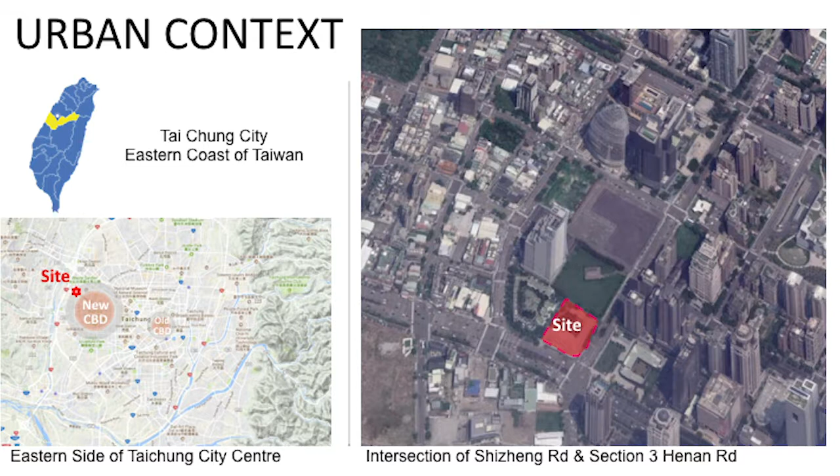And we are on a major street corner and next to a park. We're right in the dead center of the CBD. So as you can see, our site is next to the park.

Now there are many new buildings around, and all the buildings, these high-rises, they're all boxes. Some very interesting, beautiful buildings, but they are all generally boxes. I think most high-rises are boxes. So one thing we try to do on this project is how do we get away from that simple box.

It's just to resolve all the function. The problem with boxes is you're either inside or outside, but you cannot have a kind of spatial environment inside. So that's one area we wanted to tackle.

Also, in Taiwan, like buildings in southern China, you have a lot of these very local houses, local buildings from history, from the past. So we try to touch upon that, but in a very modern way. Our client made it very specific that he wants a bank that is very, very modern.

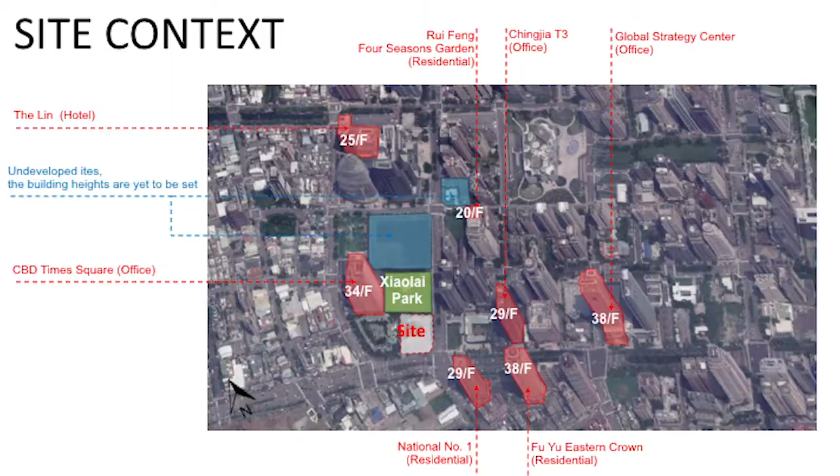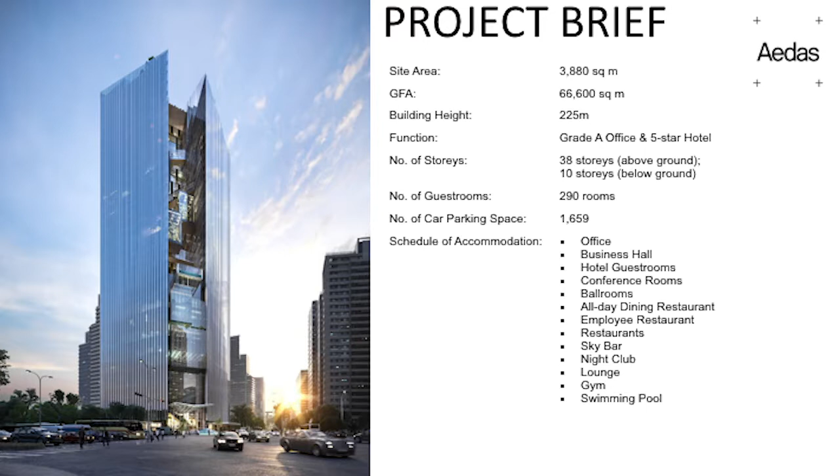So if you stack the program together — and we do quite a lot of skyscrapers — this is what you have. You'll have the hotel stacked on top of the office building, and on the bottom you have the headquarters and the main lobby for the headquarters, and then some amenities on top. So that's the basic diagram you have.

So what we tackled is, how do we make this building a place? Now, just a little bit about our client: he is second generation. He just became chairman of the bank, and his father worked his lifetime to create this bank.

It's called Taichung Bank, and now it's become a national bank in Taiwan, one of the main national banks. So he specifically wanted to dedicate this building to honor his father, who's very healthy but just retired, stepping down, with the son taking over.

So how does he honor his father? We wanted to give him a way to honor his father by giving the bank and this building to the people. Usually a bank is like kind of all enclosed, so how do we give it to the people, to create a very interactive environment that is friendly?

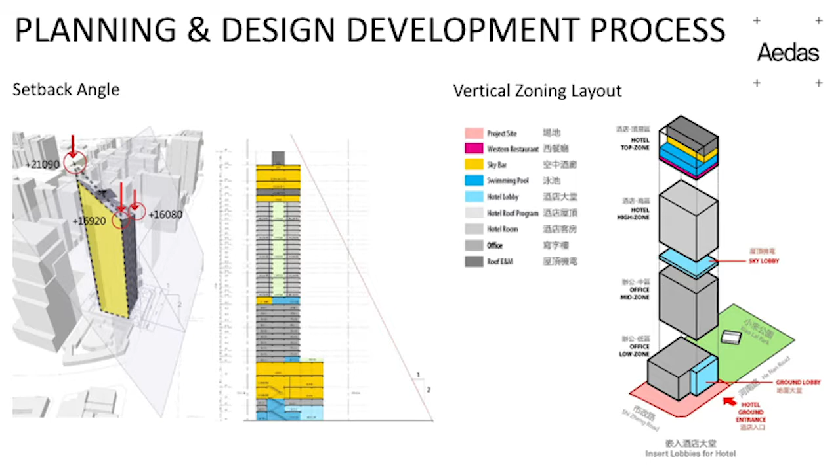So what we did, very simply, is we cut the building in half, opened it up, and put all the amenities — all the blue you see — in the middle of the building.

So what you're doing is creating — if you go to Taichung, Taiwan, you have many of these traditional buildings that are one story with a courtyard in the middle. What happens is you go in and find out that the heart of the house is actually outdoors, it's green.

So here, in a modern way, we try to achieve in a three-dimensional vertical way that the center of the building is outdoor, it's green, like the traditional Chinese building.

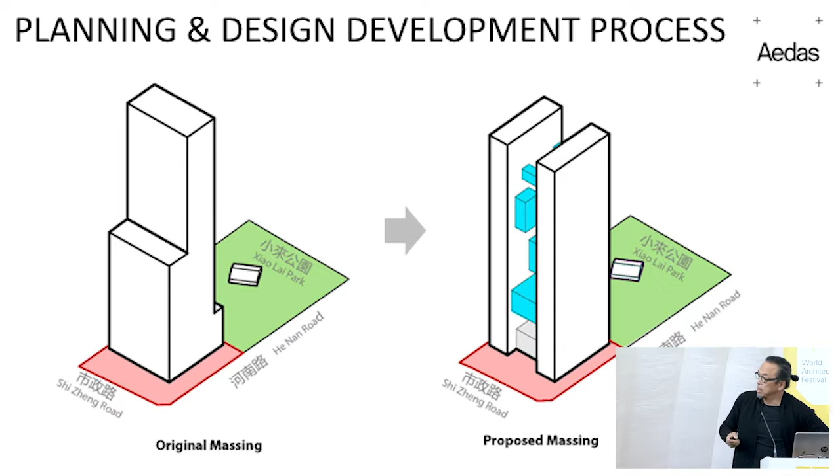So how do we address the street corner? We take that green center and turn it 45 degrees, because it's right next to that building. Turning it 45 degrees creates an urban space, a street corner that people can gather.

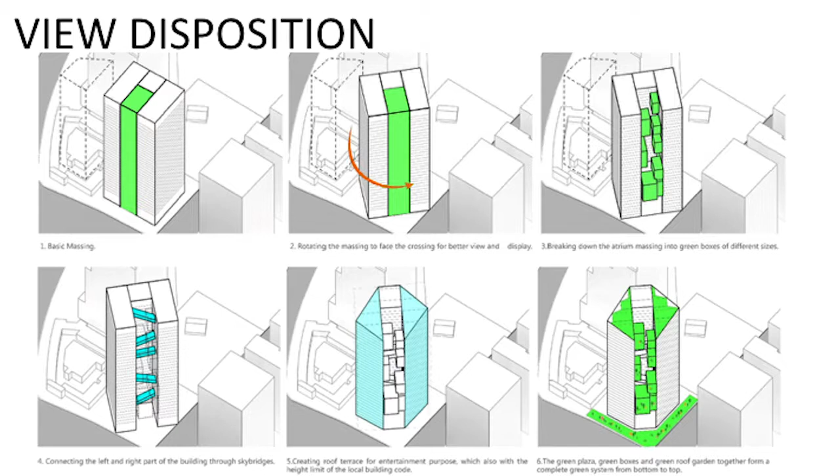And then you put in the amenities, break up the amenities in the middle, and link the two sides. So you have the building with the amenities, and then we put green inside these — I'll call them boxes now, but in actuality they will become...

lanterns. This is the Taichung Bank in Chinese, and that's their logo. You can see the logo — we kind of adapted to it, so you have these two things holding a void, a space in the middle.

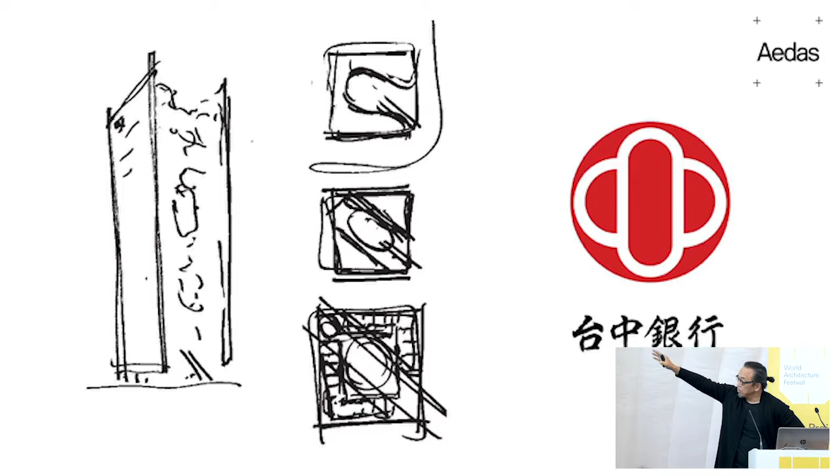So in a very similar manner, this is our first sketch of the building. When you open it up, we try to create the space inside, link the spaces, and adapt the spaces to the function.

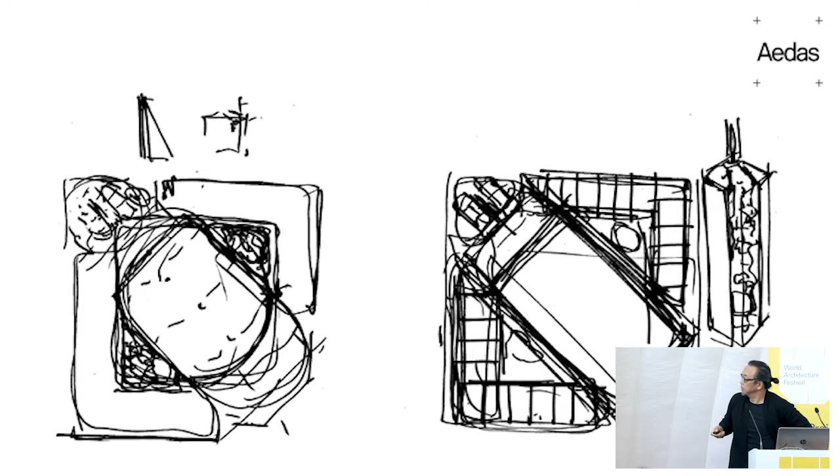So in actuality, this plan is very much like the bank, their whole idea of giving and working with the people. So these are the first initial sketches.

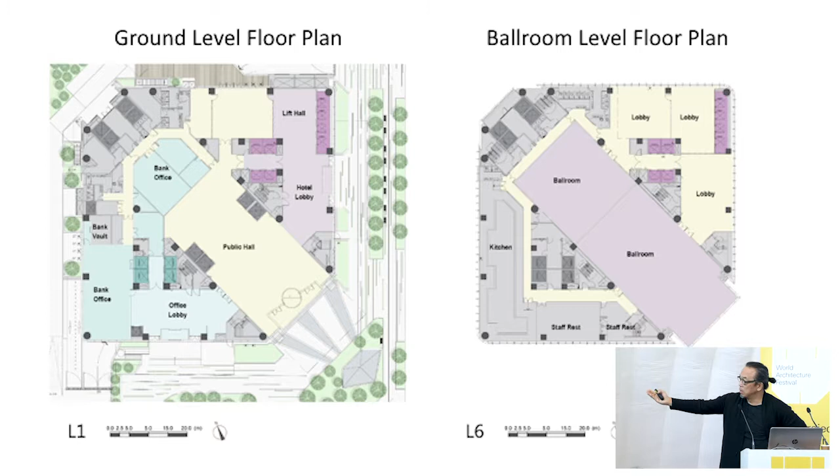Just a little bit about the plan. The yellow is our main public hall. Right here on the corner, you can see that we created a gathering space that brings the hall in. The hall is public, not just for the bank, it's for the public. The bank can use it, the hotel can use it, but although the bank and the hotel each have their own entrances, they can share the center space.

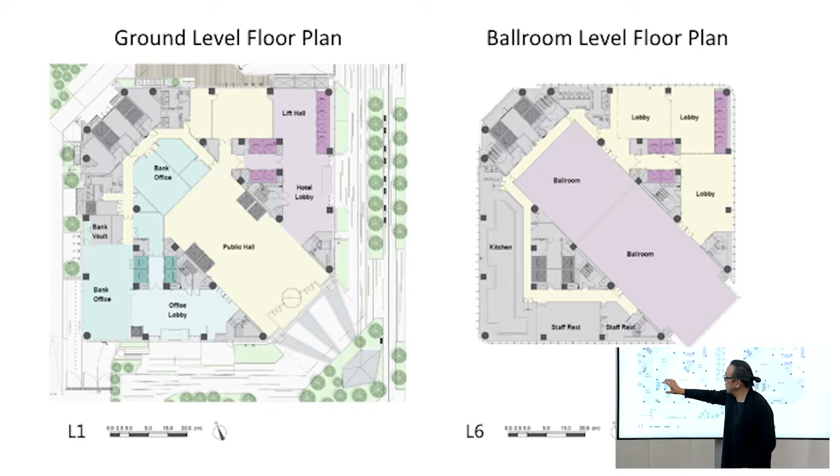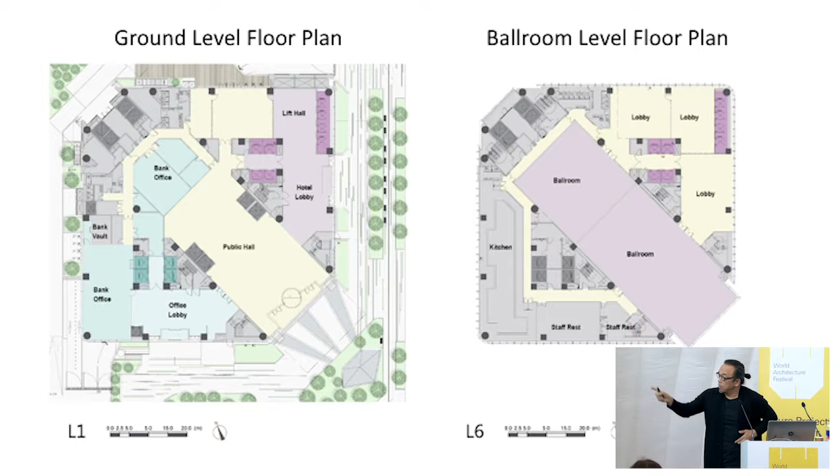I just want to make a point there. There are 3 cores: hotel core, office, and bank core, bank office, and that's mainly for services. So that's about efficiency, because as you go up the building, it's going to become 2 towers rather than 1 - one on the bottom, two on the top. With 2 towers you'd have 2 sets of fire stairs and all this, but this way the back is connected, so it's very efficient.

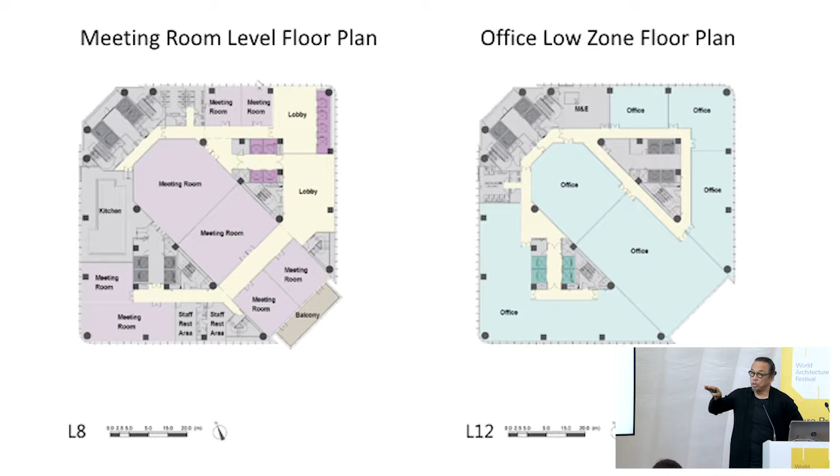We put all the amenities in the middle, all the meeting rooms and the ballroom for the hotel right in the middle. At the top of the ballroom, on the 14th floor, we put a swimming pool. A little change from this function - we've recently been working with the hotel consultant and changed their program with the pool.

We made it all restaurants and bars right around this pool, and we're also putting the hotel lobby in the area. We want to make that floor, that pool area, the heart of Taichung - where all the young, cool people would hang out, right around the pool. And of course the pool is a glass pool - it cantilevers out 10 meters, so you can see it from below up.

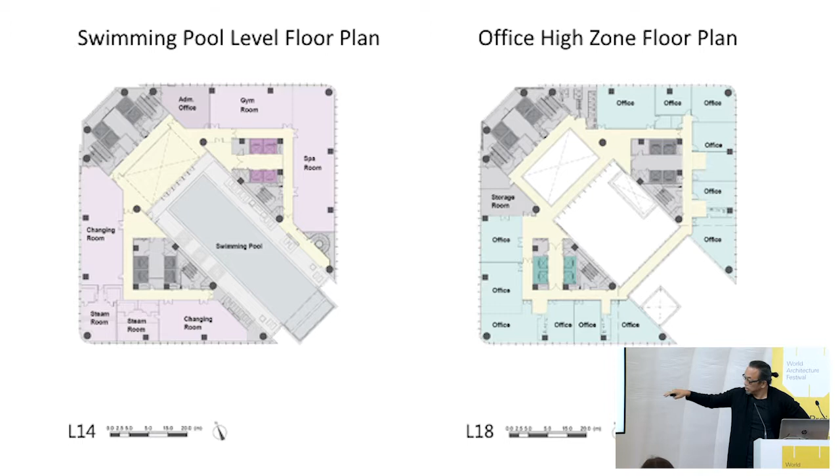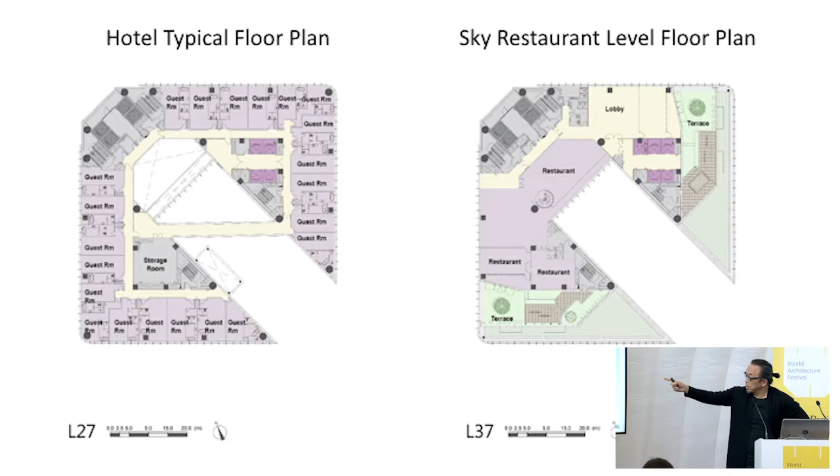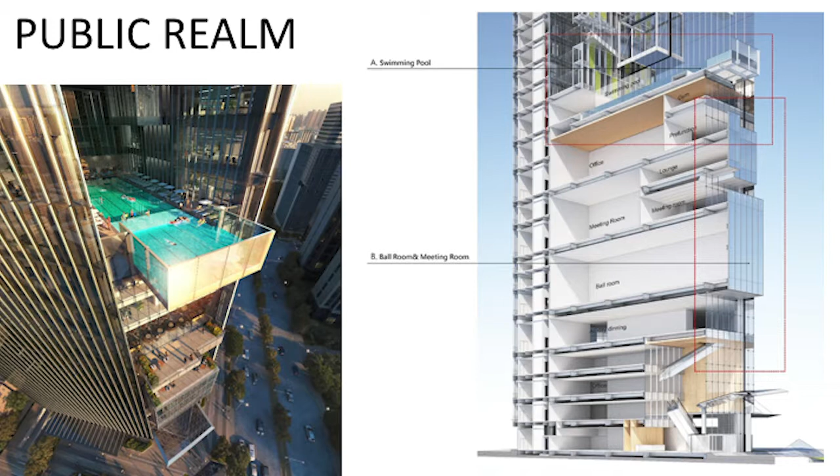Inside is that public lobby, which we're going to make into an art exhibition lobby on the bottom, and you can see the pool cantilever out. These are just some of the stacked amenity spaces. The lobby is a 4-story high lobby, very well lit.

You can see on the pool, that area - we developed the design and it's now even more green, kind of like a real green heart up there. That's the cantilever; the glass is actually acrylic.

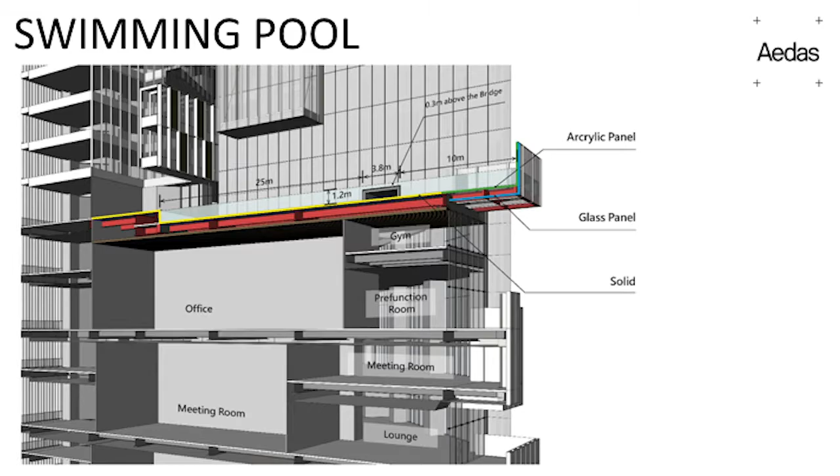So you look at the pool, and as I mentioned, opening up the sides - you have restaurants wrapping all around, and these boxes on top are lanterns, possibly colored, attached to the elevator lobbies on the different floors. You can enter them - there are little gardens inside, and they overhang the pool.

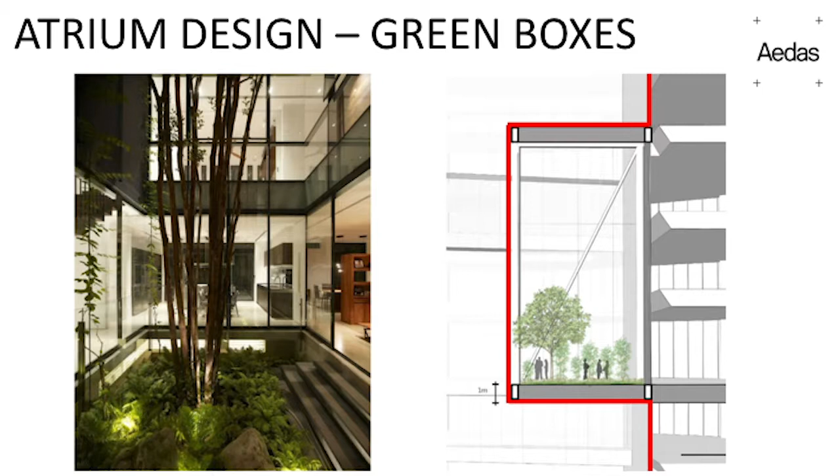So that's kind of a section - you have different heights. This particular one is three stories, so you can grow big trees inside. On the walls of that garden, which we're starting to call a secret garden, you have LED panels - not for commercial advertisement, just for art displays, a very interactive art display with plants and lanterns, Chinese lanterns of course.

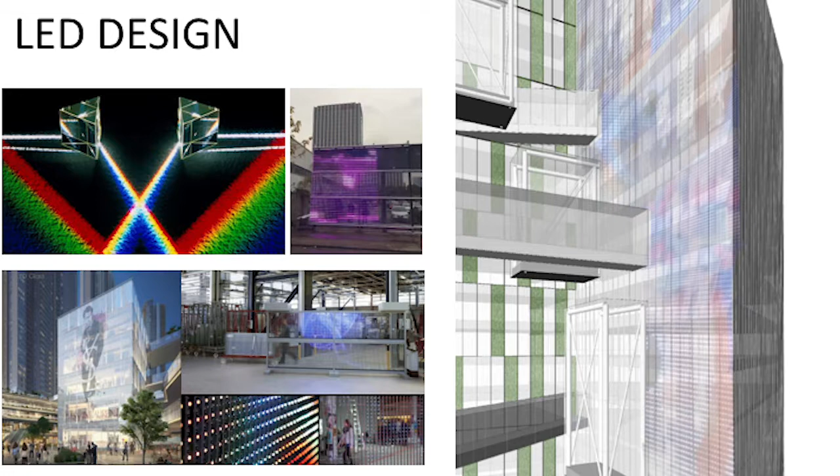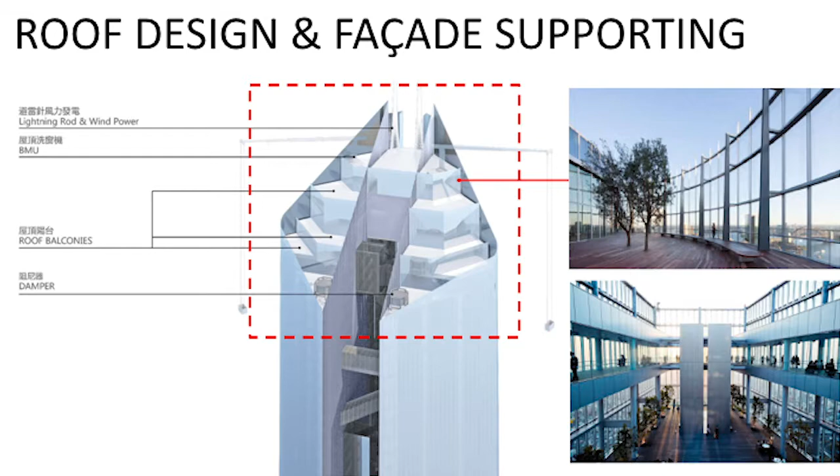On the top of the building, rather than having corporate conference rooms and stuff, we chose to have coffee shops and restaurants, and they terrace down so you can enjoy the outdoors.

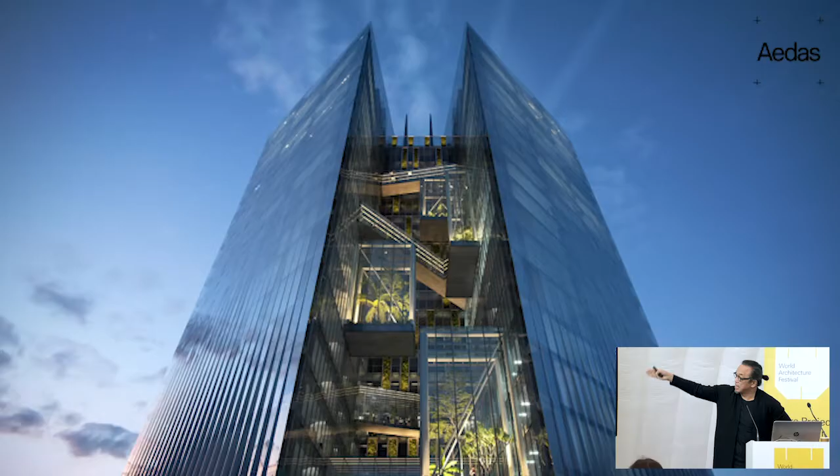It's the happening place, the place everybody wants to go - to hang out, have a cup of coffee or a drink with your friends, or have breakfast and brunch. That will be the place, shared among many people with the office, the hotel, and all the public spaces. And that's looking right up the building.

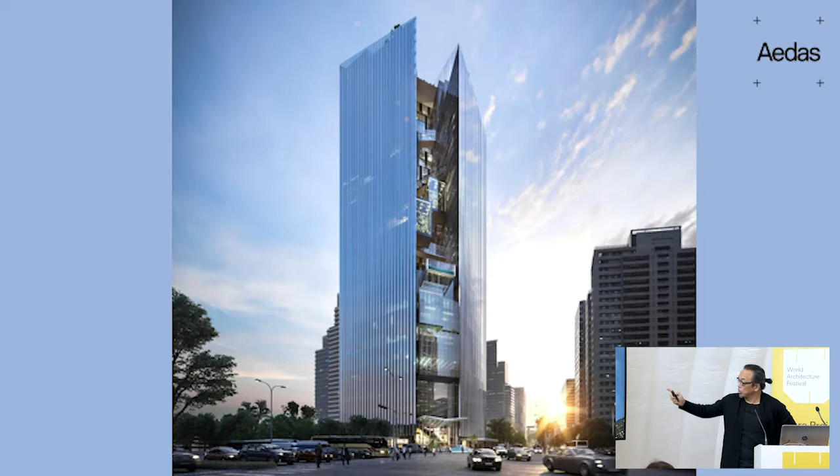I'm a really keen swimmer, so I'm completely sold on your pool. And I like the idea that this is a kind of box of public amenities that becomes a kind of vertical street, with people congregating for different activities.

I just want to follow up - how public will it be? Given that you have a bank and hotel with security and access, if I just wander in off the street, could I use the pool? Well, you have to.

Bank entrance is here. Hotel entrance is over here. That's the public lobby, yeah, with constant art exhibitions. So you go into the hotel, up to the lobby, and the check-in lobby is actually on that floor.

We're going to combine all that together with restaurants, the pool, and gym. So that's going to be happening. And you can access the pool, you can access the restaurant. Now, whether they will open up the pool to everybody...

So at the moment, you have to be a hotel guest in order to use it? I don't think so. Some hotels have the idea where you go to the restaurant, the coffee shop, look at the pool, and you can get a monthly membership to the pool, the gym, the spa. They have a spa, so you can become a member that way, or you can pay on the spot. I guess because it's not totally fixed on one particular management hotel yet, that will be kind of a management issue.

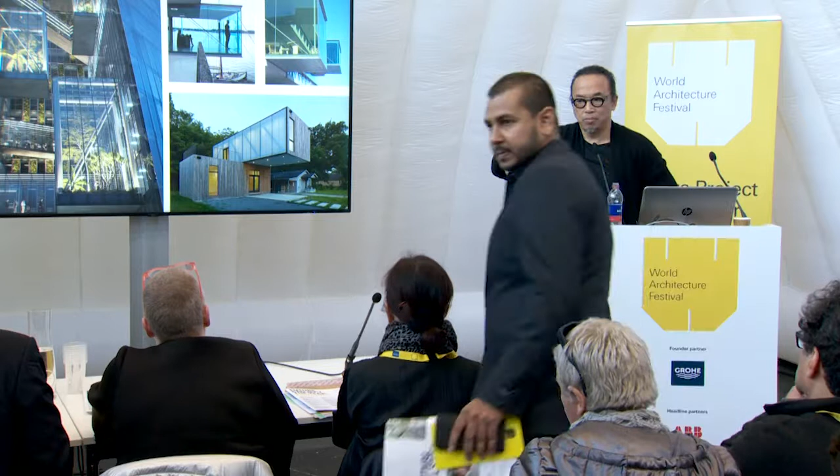That's what we want, because the new CBD area that we're in is kind of harsh, just very quickly built. There are no places. Now there's some gardens, but there's no wonderful little niche places, and that's what we want to do.

It does sound like you have a bit of leverage with the client and also perhaps with the tenants, so hopefully that sense of public access can be preserved when it's finally built.

Yes, this is one wonderful client, very young, very interactive. He knows exactly what we want to try to do, and I think as we're constructing this right now, we're looking to make the program even better, as I just explained, to make it even more viable in making that a true secret heart of Taichung.

It's the place to be. But I think we have slight concerns about what it's like to be in those offices around, they're just kind of floor plates, more conventional. But anyway, we must move on because I think we're getting slightly behind time.

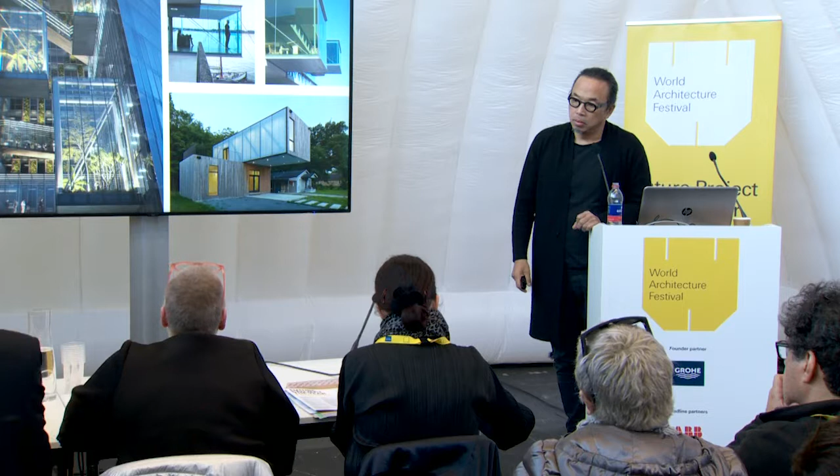But just stay there and I will do the honours. Is that a question?